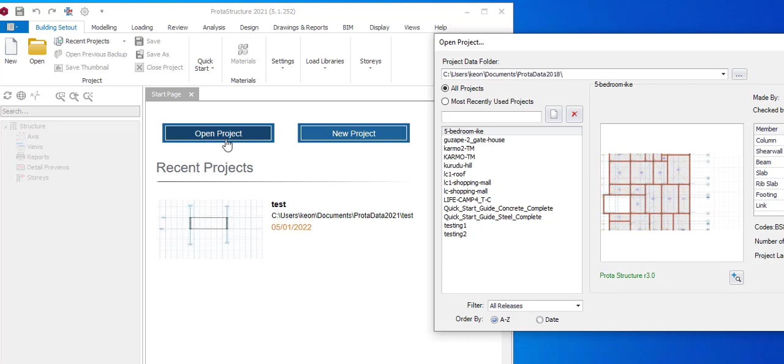This is new project. Open project, these are the various projects that you've done. If you want to open any of them, you just click and you open. So this is this part, which is what is here. This other part you are seeing is here, recent project. So there are some similarities and some differences. So this is what we'll be discussing about.

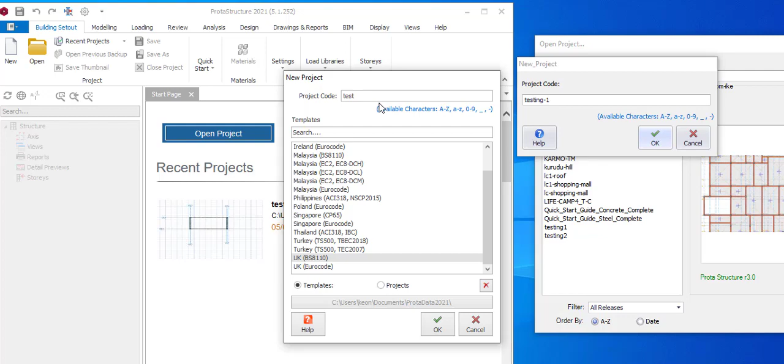So if we say new project, we click on new project. We can now name it, this is the project code. New project, we say BS8110. We can say testing. Same issue on the name. Now if you click on this, it gives you this project code, which is the name. You can see testing. There's no space, so you just put dash. You can put -1. Same thing, we say -1 here. So we've placed BS8110 on this new project.

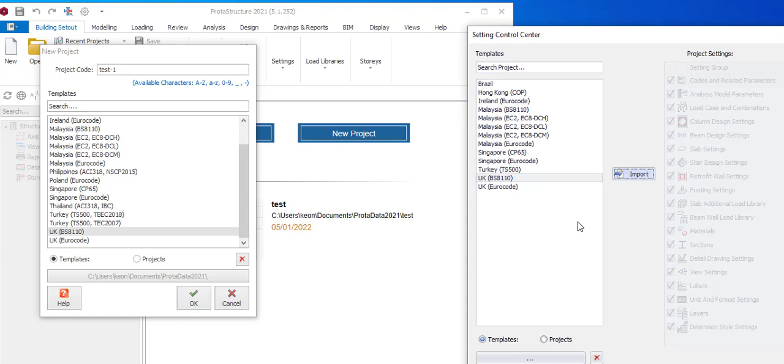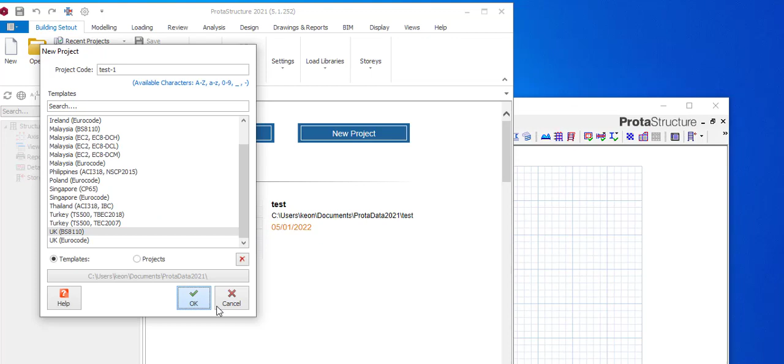After you click, that's when this one comes up. But immediately you click on Prota 2021, everything here comes up. So with this, we say import, whereas in Prota 2021 there's no import. You just say okay. We say import here. It will open up. Yeah, it has opened up. So while here you just say okay. Okay, so we are here.

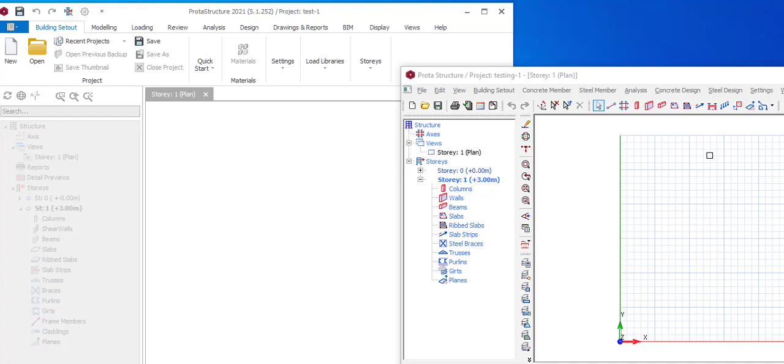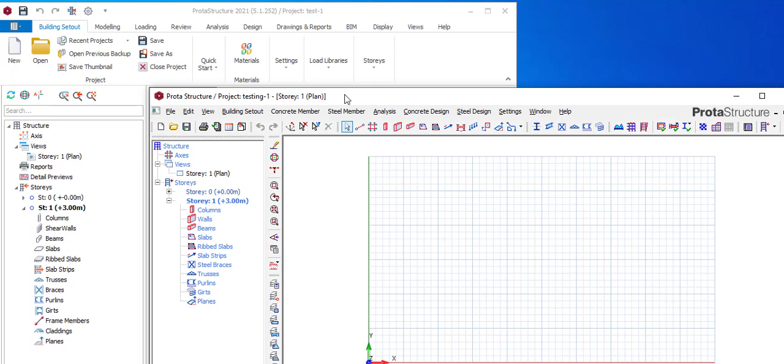This is the interface. If you look at them, similar pattern. You are seeing new project, folder, save. This is where they place all these ones: quick start, material, settings, library. These are the different arrangements. They put reports, detail here. So these are the different ways these are alike, but you need to understand something here.

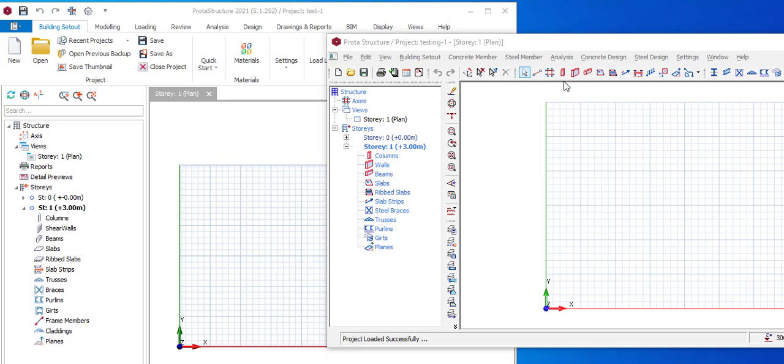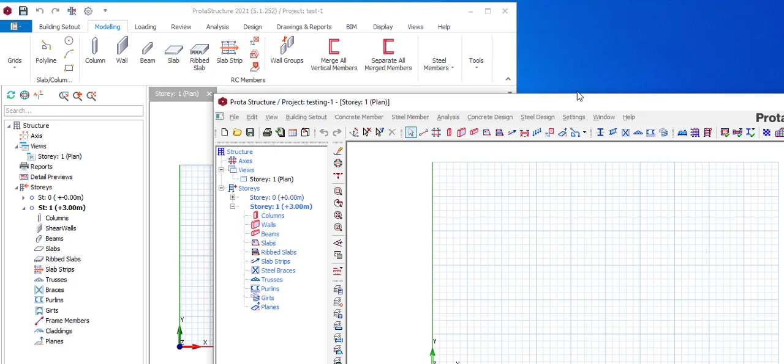In Prota, the first thing you do is your grid line, but in Prota 2021 you won't find any grid line here. Let's say we are doing orthogonal; in Prota 2021 you come to modeling, whereas in 2018 it's just open for you to see. When you click on modeling, you see column, wall, beam, slab, rib, strip. Then you have all this here, which is same. Then on coming to this grid, this is where you see your grid lines and your orthogonal.

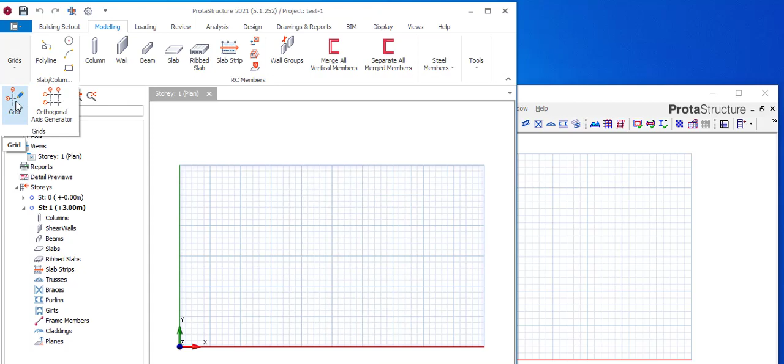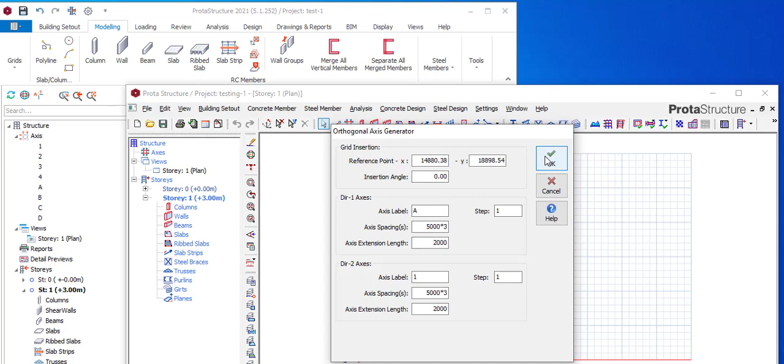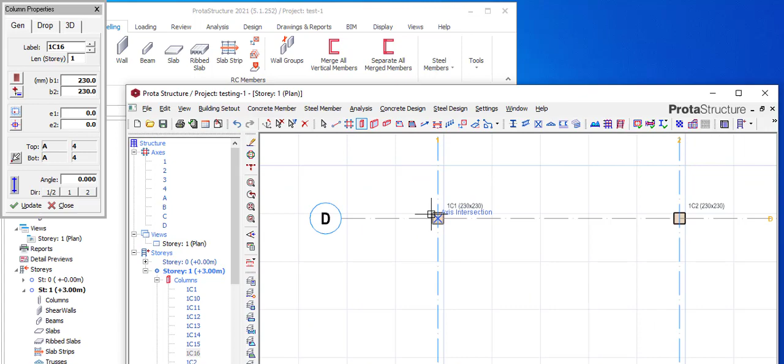So you take your orthogonal, you click, same pattern as this, you say okay, and it comes here. While here we do this, we say okay. We can choose 230 by 230. Please check our previous video on how we input the columns and the rest, but we are just doing it very quickly. You click on this and make it 230 by 230. You can either click one by one or hold down Alt and click, so it automatically fixes the columns.

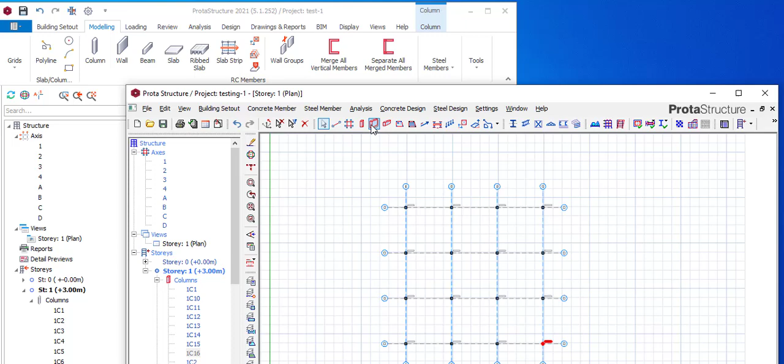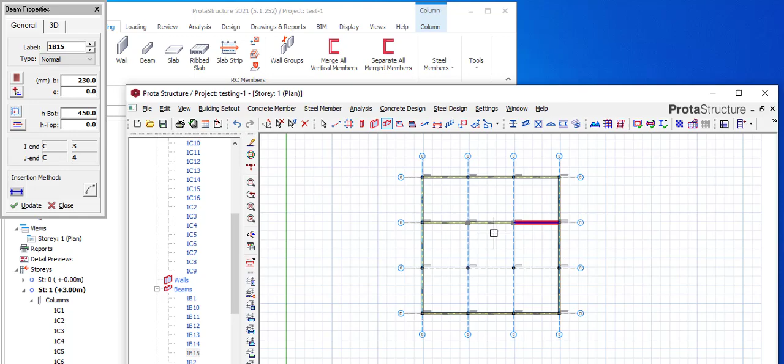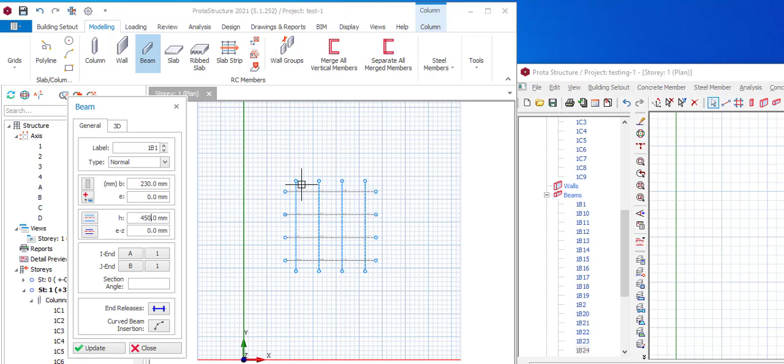We are still on model. Come back to model, we say beam. We come to beam, we say 230 by 450. You can do this, this is what you do. Okay, good. Let's come to 2021, come to beam, same thing, 230 by 450, and we click, click, click. Good. We're done with this.

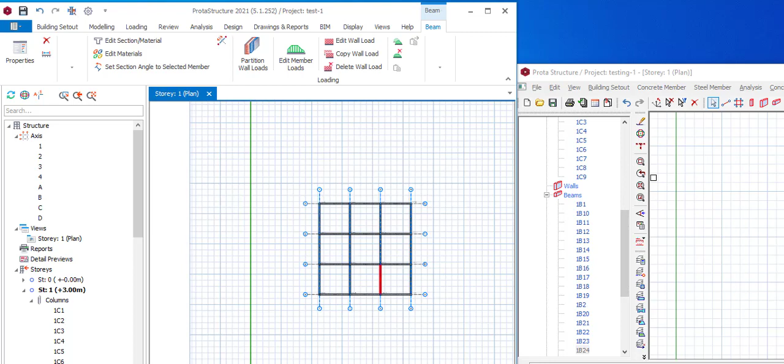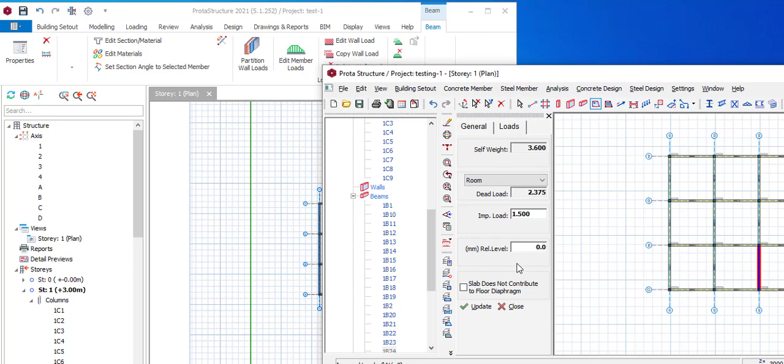So next we come to slab. Click on slab. Slab, we say 150. We come to load. We say room. We say 1.5, and we click on that. We come here, modeling, we come to slab, same process, 150, load, same, let's say 1.5.

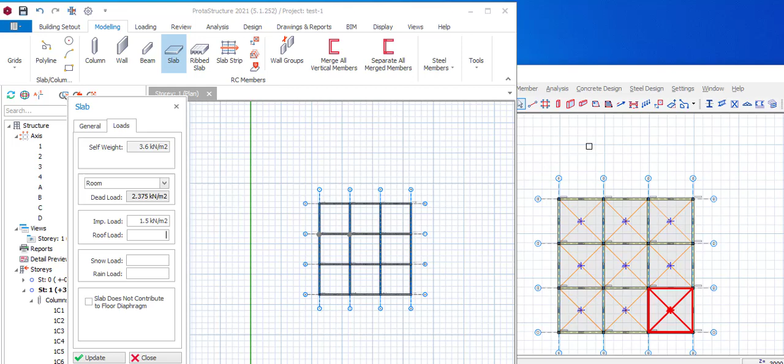So the difference here: in 2018 there's nothing like roof load, but in 2021 there's roof load, there's snow load, there's rain load. So this is a new improvement on 2018. If you look here, there's only imposed loads but no roof loads. That's one limitation of 2018, but here they took care of it. So when you are working with load, you can add your roof load. So we've gotten that. Add, good, you can close.

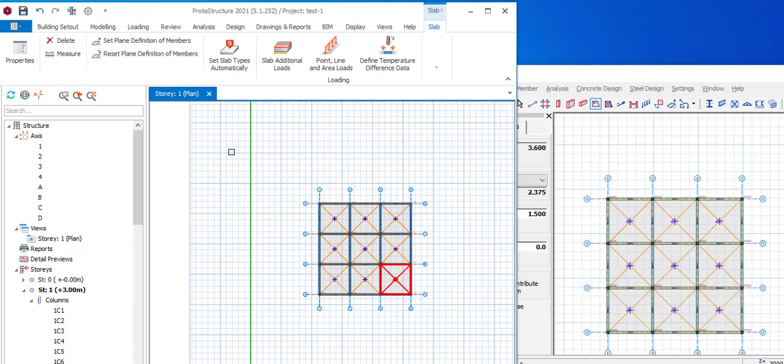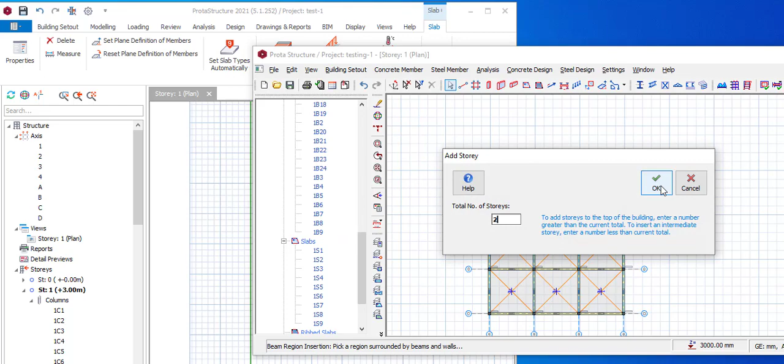So once you've done this, the next thing to do is to go to building setout, insert story, let's say 2. Please check our previous videos to understand what we are trying to do. I won't really have time to go through it one after the other.

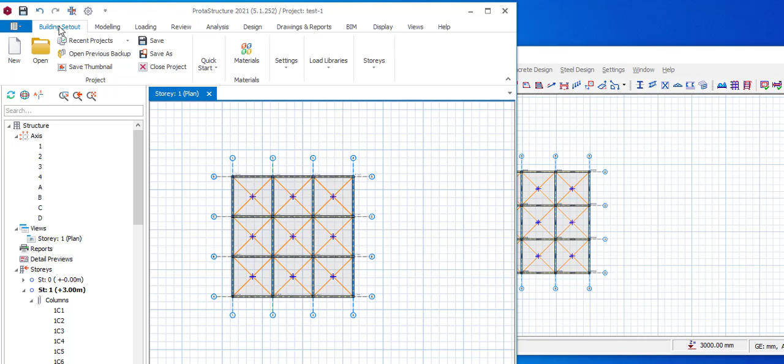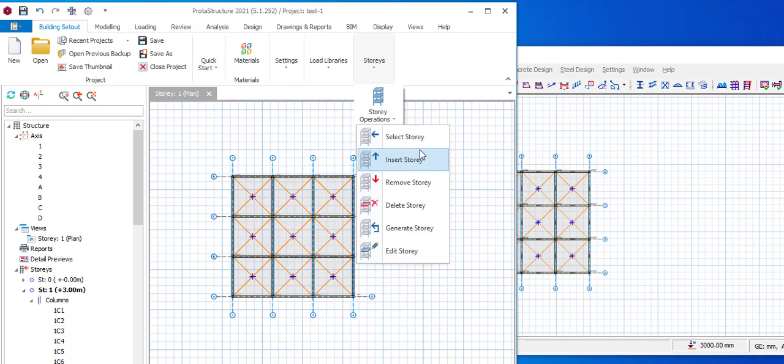So you go to building setout. 2021 is not like this where you just click and you see all those things. What you do is you come to story, then you see story operations, you click, you see select, insert, remove, delete, generate. This is where you click insert. We now make it 2. You say okay, you say yes, continue. We have this. We come here.

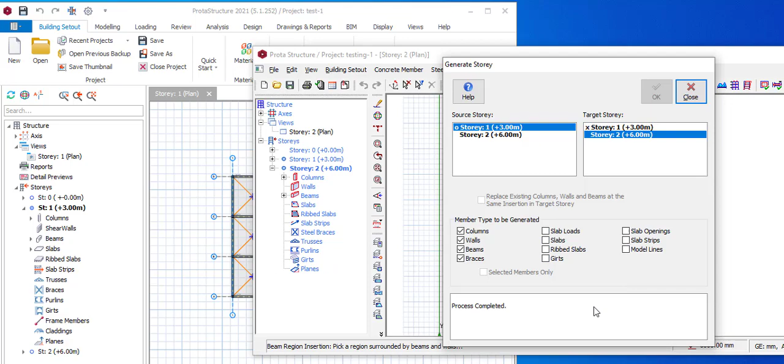So with this, we can go back to here. We say generate, and we click this. We uncheck all this—please check our previous video, I won't be explaining that again. So we have this here, and we can still come to this part, I will say generate. We uncheck all these other ones, then we say okay, complete.

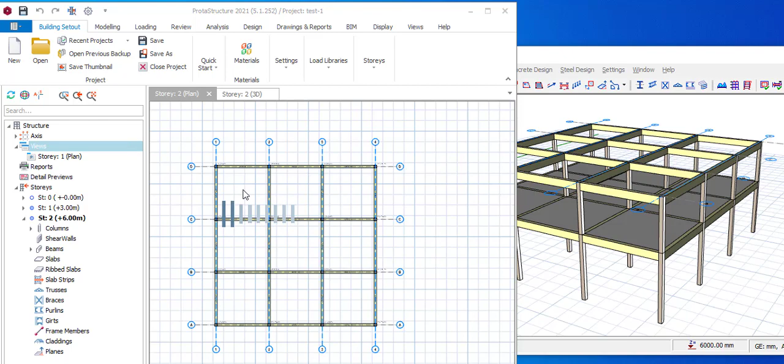Okay, we close. So we have generated this, we have generated this. What we can do, we can go to view, right click, and do 3D. Same process, we come here, 3D, give it some time, and this is it.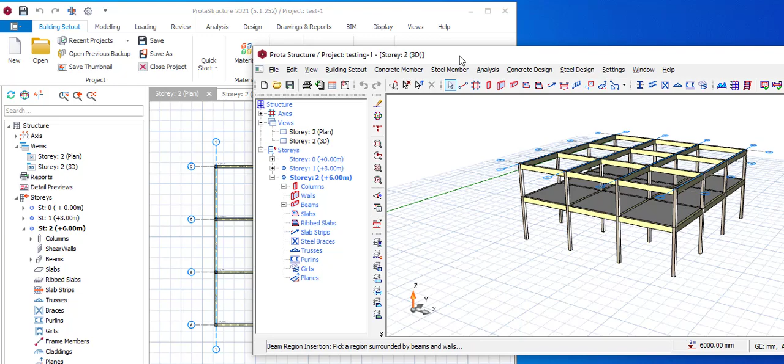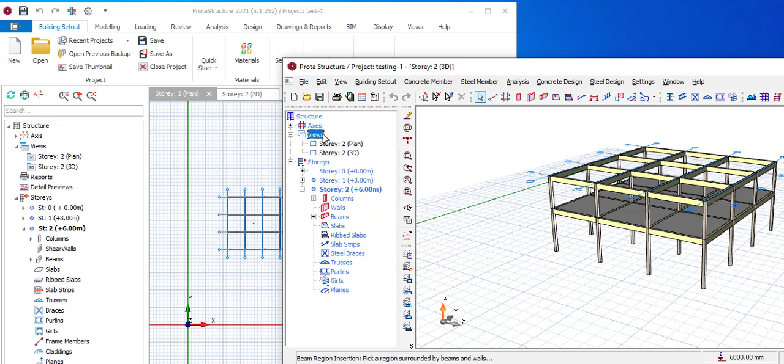It's more, okay, similar, yep. So the difference here is once you make it 3D, you can easily just change tab with this. These are some new additions that they've done on Prota. Okay, you can go back and turn it to, yeah, okay.

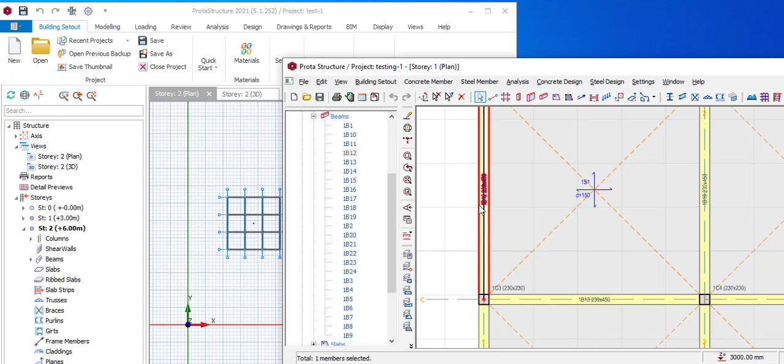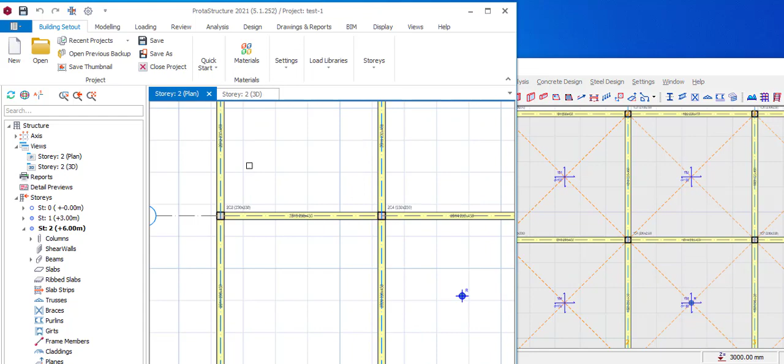With this we can come here and we edit beam wall load, same process. We will not be going all through detail explaining—please check our previous videos where we have done something like this. Edit wall load, same process.

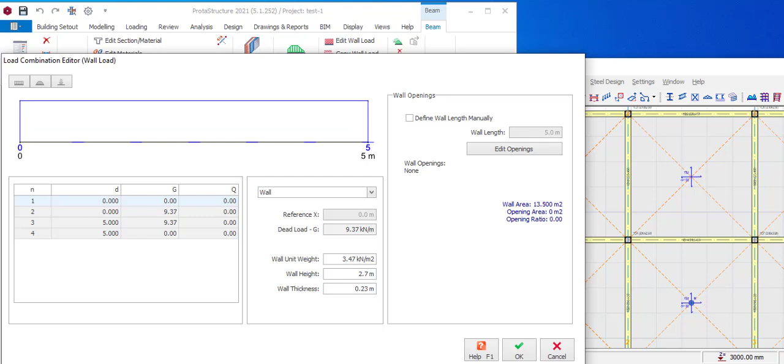Same, is it? So we can say copy wall load, highlight, right click, and we say paste. Say yes.

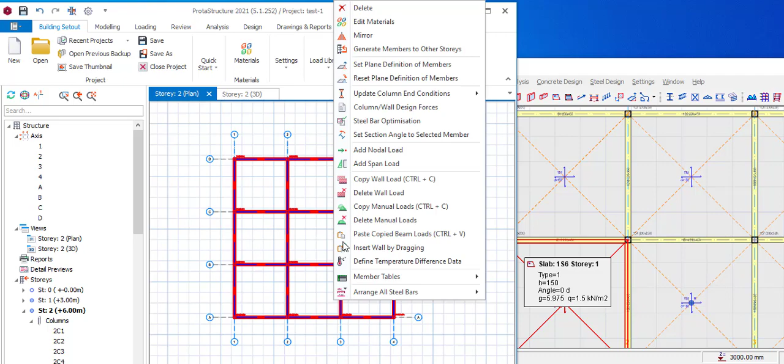Okay, we did a mistake here. This should be delete. Yes, you can copy this, copy, and we paste.

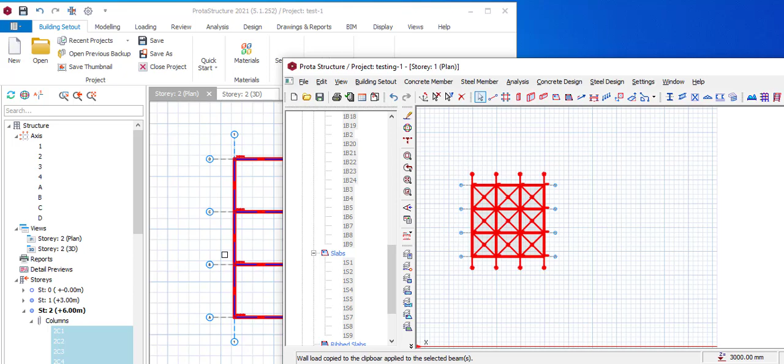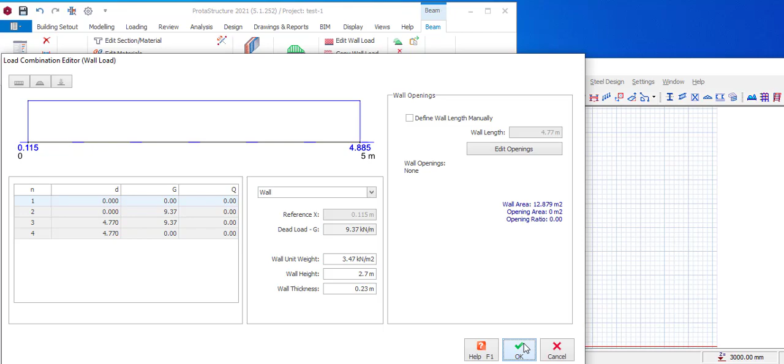Come to this and we repeat the pattern. Edit, so copy, paste.

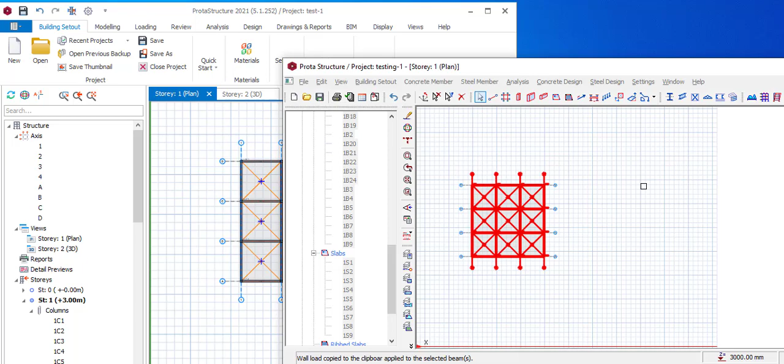So with this we have done everything here. We can now go to analysis. We come to building analysis, building analysis.

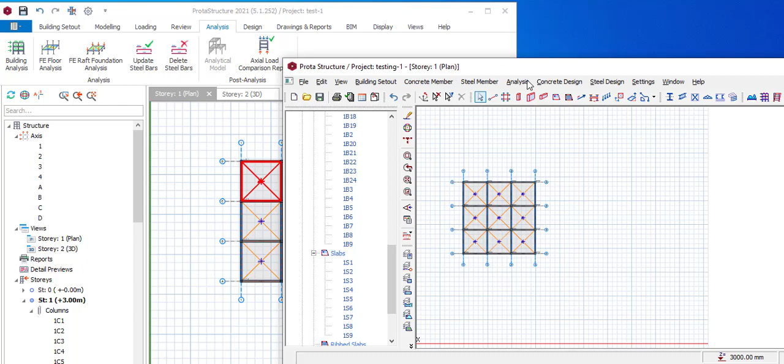So if you look carefully, you can come to this part. You say analysis, building analysis. It takes time, so it comes up. You click on load combination, you follow load generator, you say yes, okay, you say okay, close. Same thing here, come to this part, you see all this loads.

And you say okay. Let me do this again.

If you click on this, this is what appears. You click on your load combination. If you look here, this is where it comes up: create unfactored load. You say yes, and you say okay. This is what it will do. Same process, you say okay, you can close your work.

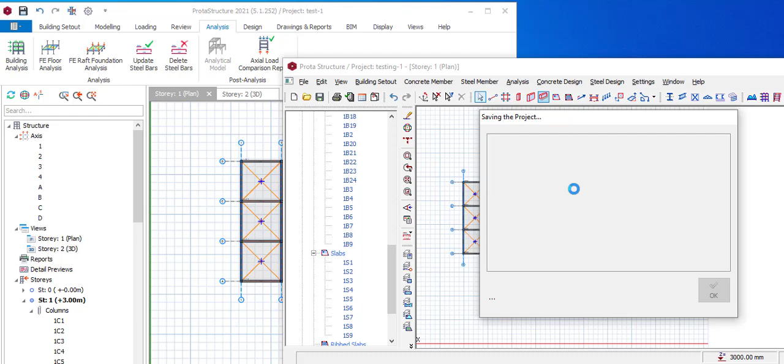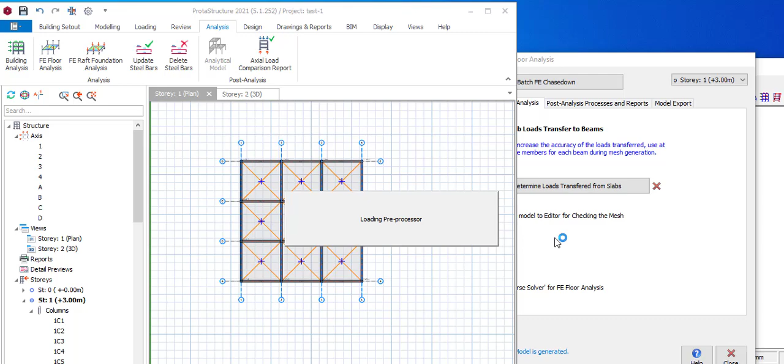Same process, we come here, we do this load decomposition. Same process, batch, and you say okay. Yep, give it some time. Say okay, and you close.

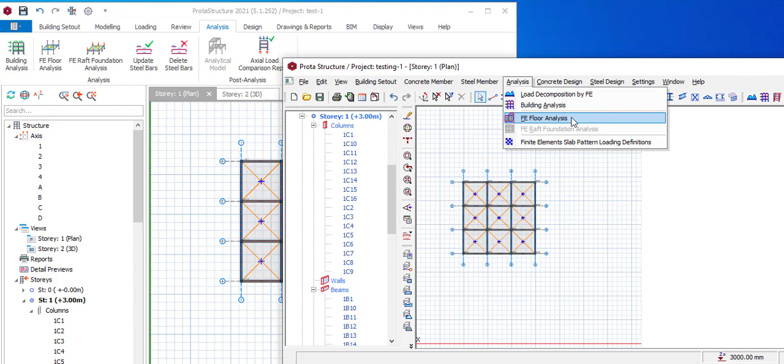So if you click, this is what comes out, like this. If you click on this, this is what comes out.

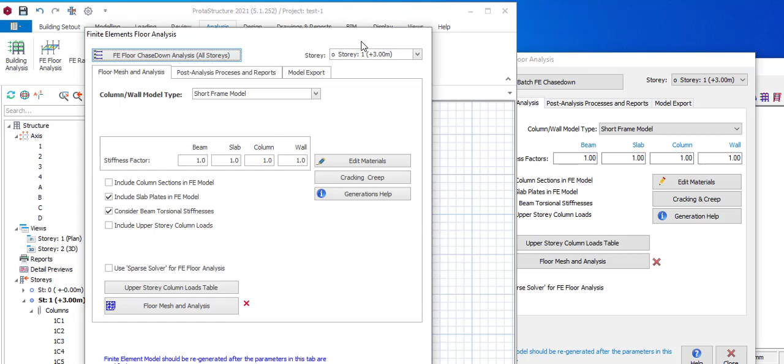So what you need to do here is, most times, our stiffness factor—we try to change our stiffness. What we need to do is change our stiffness factor. Please check the previous video.

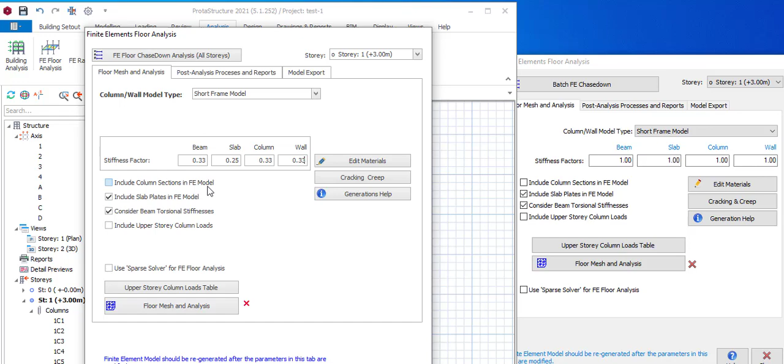We will not be analyzing everything. So with that, if you either click floor mesh analysis, or you can do in batches, which is this way, to change this. Now that we've changed the factor, stiffness factor for slab is 0.25.

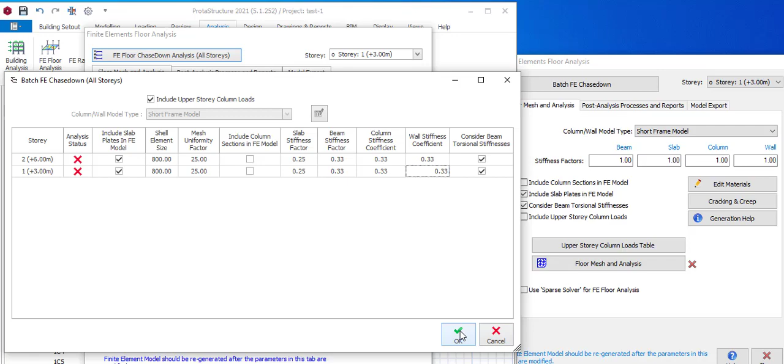Okay, stiffness factor for slab is 0.25. For slab, for beam and the rest is 0.33. This is not the video where I will be explaining—please, you can look it up. You say okay.

Allow it to run. So it is running, so we can still do same here, which is 0.25, 0.3, 0.3, 0.3. I say okay.

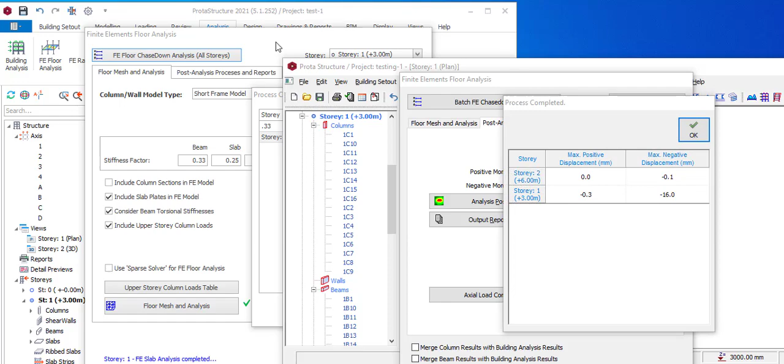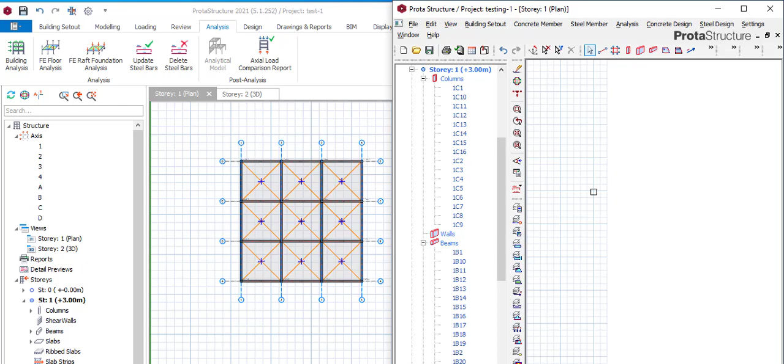Same process. So this is, you say okay, we've done that. We can close. You say okay, continue. So if you look at this, it has run the analysis. You can close, same thing with this, you can close. So this is how you do that.

So after the analysis, we'll come to building again—building analysis.

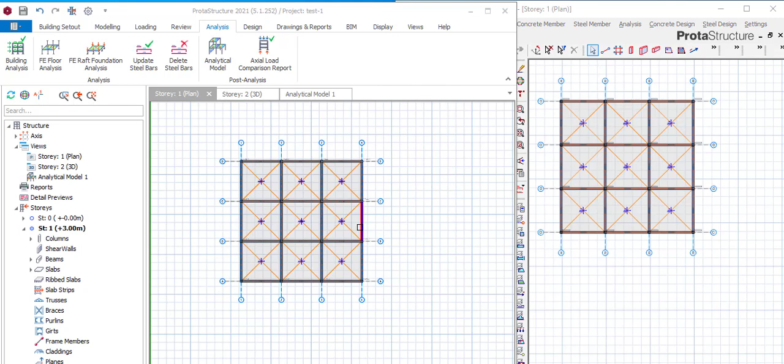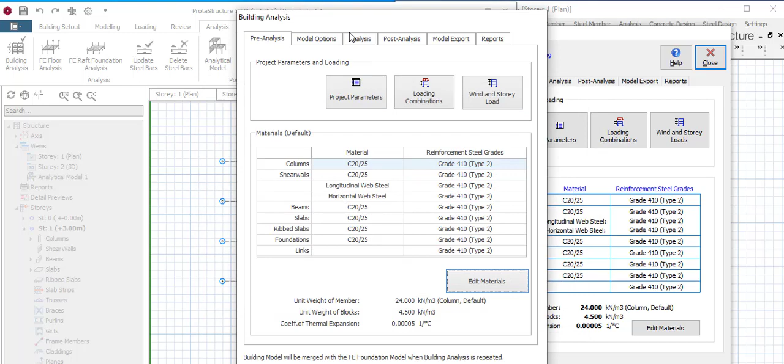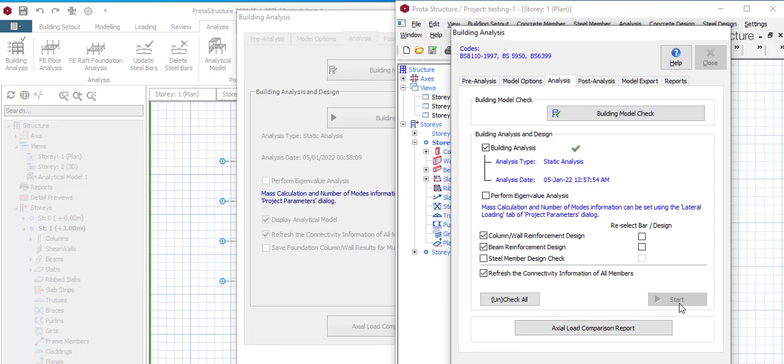Okay, what we do is we go back to analysis, building analysis. Same thing here. Then you edit material, which we've done, just check our previous video, we will not be explaining all that. Then come to analysis. If you come to analysis and click on building analysis, this is what pops up, whereas in the old one everything is there. Once you say run analysis or start, it runs your analysis.

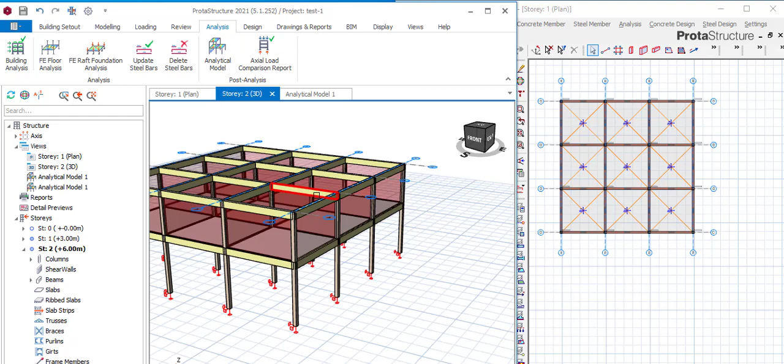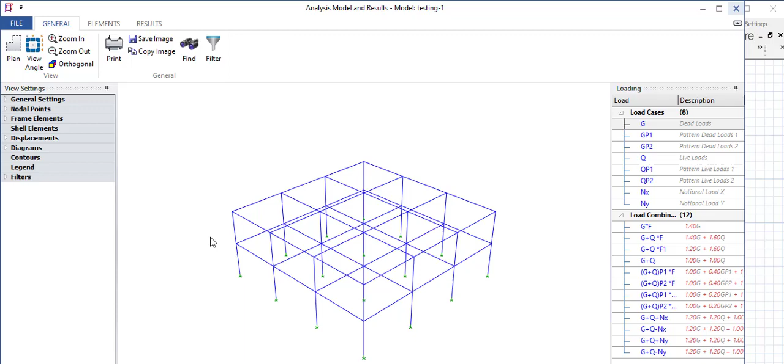You say okay, it has completed. You close. So the beautiful thing about 2021 Prota, each level you do, this is where we are. We did a 3D, it gives it on its own platform. The model analysis is on its own. This is a beautiful thing, whereas on the other part you have to go to those parts yourself: post analysis, model analysis, and it takes everything, so until you finish this before you can move on. So these are some of the new improvements on Prota.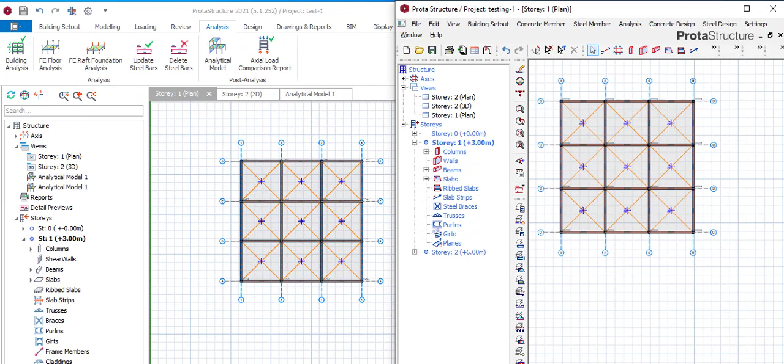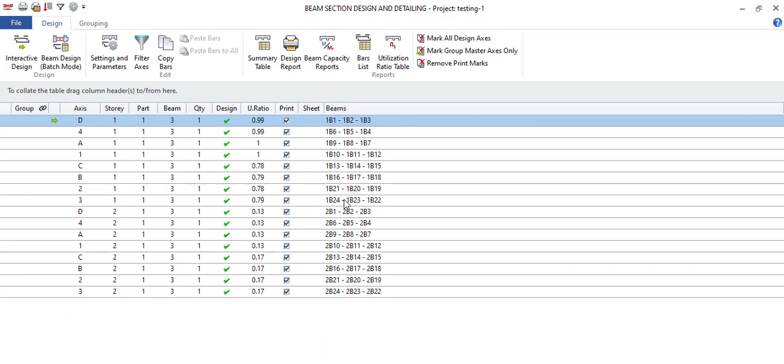So we've done all this. What we need to do now is come to concrete and see what we have here. This is it for 2018. This is where we check our columns, and we check our beams here, story beams. This is where we check our story beams, and here to check it, we were here before.

You come to design, you come to reinforced concrete, click on column. So the column is showing us that they are not sufficient. Why? Because it's picking Y12. No, that is not what we want.

Prior to this time, somebody was asking some questions. Amzat Mohammed, you didn't tell us where you're calling or chatting from. He said, thank you so much, sir. Under the same explanation on links insufficient, how can we correct the S bar top and bottom if it's showing red?

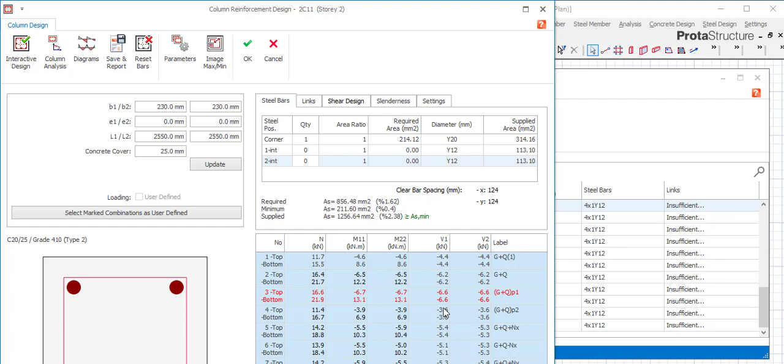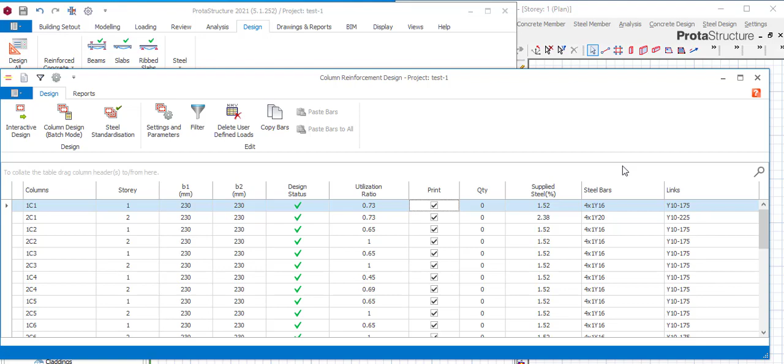So same thing, if this is showing red, it means either the size for the column is not enough, or the reinforcement is not enough. So we can either change it here. Once you say okay, you can either change it here, or we say interactive, let's say okay. So if this is showing red, you just click on column design batch mode, reselect all bars. Once it runs, it automatically selects all bars, but this is not the time for me to be explaining. Please check our previous video or make the purchase.

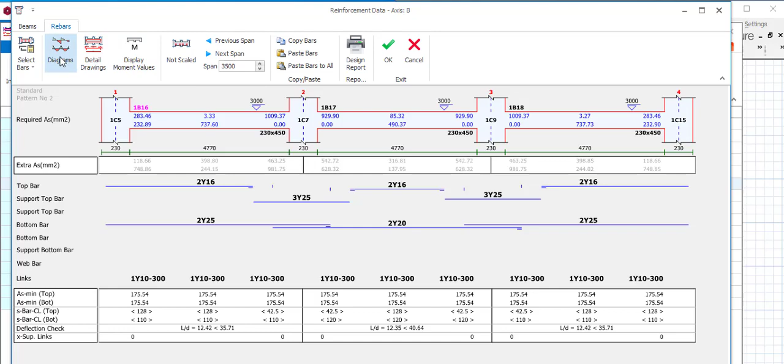Same thing here, the process is the same. Either you check on your beam, same process. You can either design manually, or say okay and it automatically upgrades your bars. Nice. You can see it has changed. Or if you don't want to do them one after the other, just say batch and select or calculate, it will do the magic. This is wonderful, very nice.

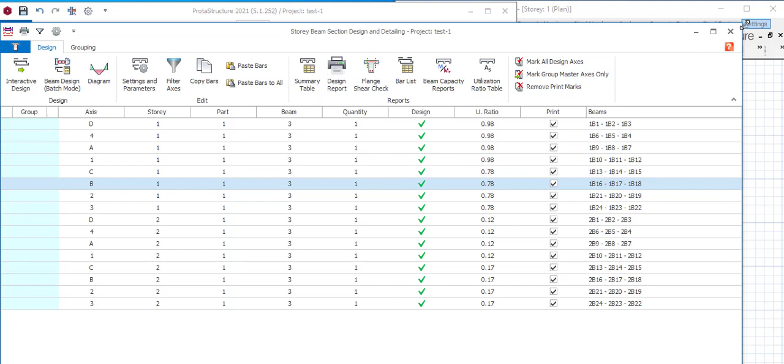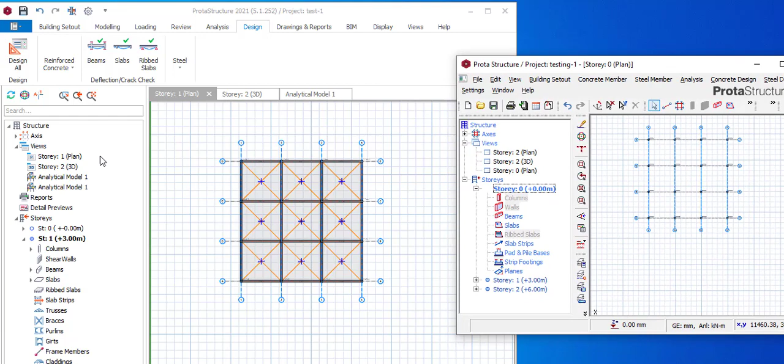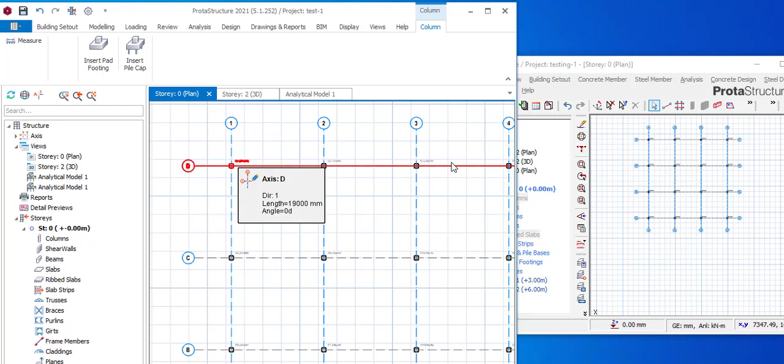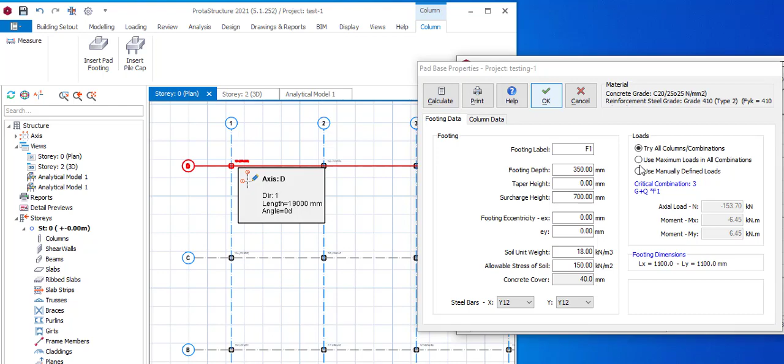Okay, we're done with this. So we can now go to the foundation, and we can call it a day here. Go to foundation, right click, say insert pad footing, insert. Give it some time. Same process, right click, say insert pad base, say okay. You can either change it. Please check, I won't be explaining much, please go back to our videos. Say calculate, this is everything. We can say yes and okay, and we have this here. Once you click that, this is what appears.

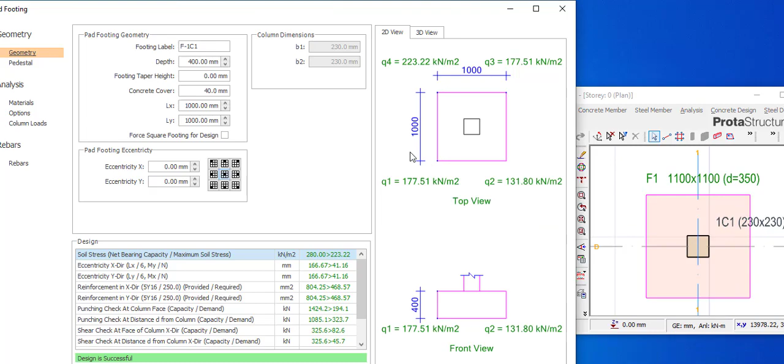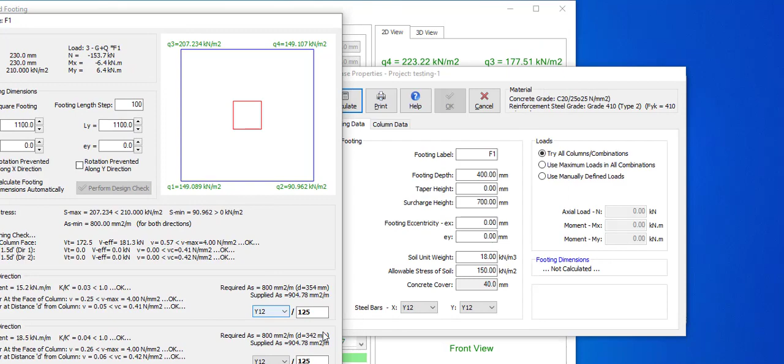This is the eccentricity, different eccentricity of your part, but we are not taking any eccentricity. Let's say we use 350. Why is it not giving us 350? Design successfully. If you look carefully, this is giving us 1.1, but this is giving us 1. Let's see, delete this. We say right click, insert. Let's make this 400. So you see the difference.

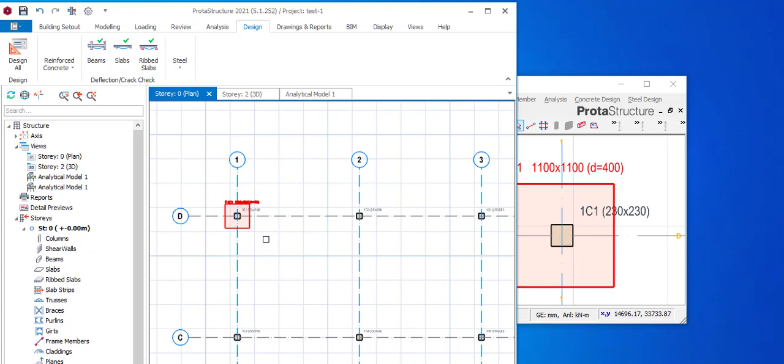This is it, we can now say okay. So this is how you do your design comparison. So it's all about preference, but 2021 Prota is quite good, quite good.

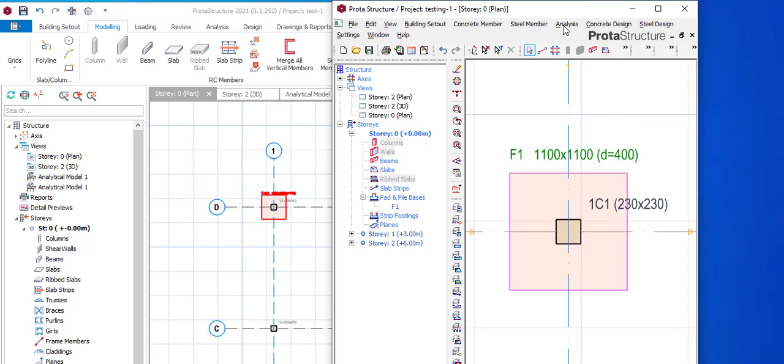So the final one, which I won't be doing, is exporting to Prota Detail. If you come to concrete, click concrete, and click on Prota Detail, it will go there. But for 2021, click on drawing, you see Prota Detail, click on it, and it automatically sends them to Prota Detail. So I will stop here. This is our comparison, whatever one you have, you can look at it and familiarize yourself. Both are very good, but 2021 is a new improvement.